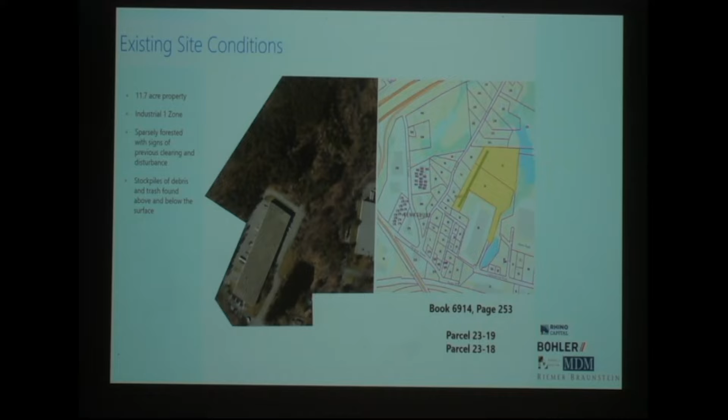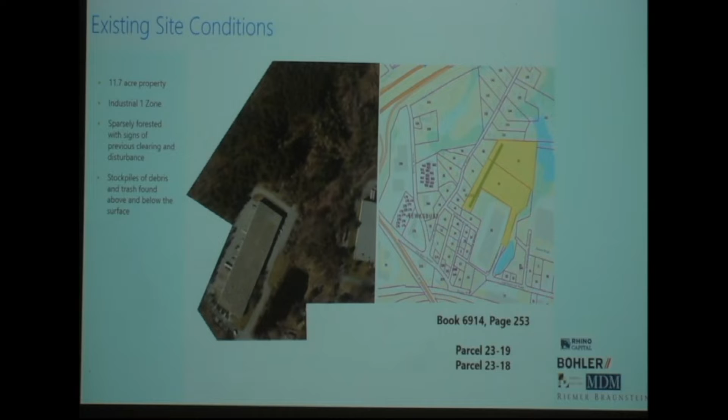This slide is the same one we've seen in the previous two presentations, just a quick refresher since it's been a couple months. These are the existing site conditions - just over 11.7 acres behind 30 Commerce. And here are our proposed conditions. This colorized plan shows an 87,000 square foot building in an industrial zone. We've got 58 employee parking spaces, 4 of which are land bank, which we reviewed at our last hearing. That represents a 30% reduction over the code, in line with the waiver requirement for the bylaw.

Overall, aside from that, if we were able to blow up that zoning analysis table that's been submitted, the project is compliant with all the zoning bylaws.

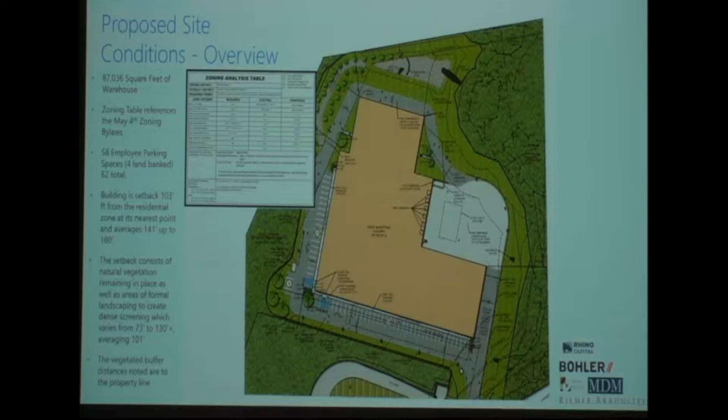So we have one slide on traffic. Do we want to hold this to the end, or do this now? What's best for the board? Why don't you do the rest of it, and we'll do traffic one time with the consultant. Understood.

So site revisions, Greg, I'll let you go through those. Just to recap, these were some of the changes we made and presented at the last meeting: the addition of those banked 4 parking spaces directly adjacent to the building corner entry, a concrete pad for the bike rack, and blocking off access from the back portion of the building except for emergency situations. We also changed the lighting pattern back there so it's all motion sensor, so there's really no activity happening at the back of the site, and no lighting either, except when somebody is around the back of the site.

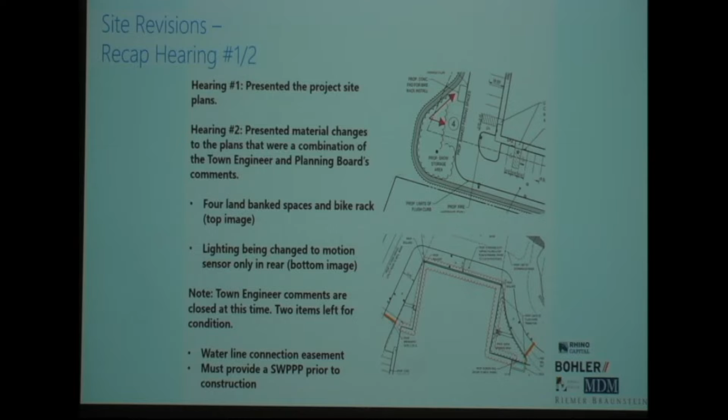And then I'll just talk about the town engineer comments real quickly - those are the two things I mentioned before. The comments are closed except for these two items. One is there's a water line that exists on the 30 Commerce property near our property line; they'd like us to get an easement in place with the owner to access that water line, since we need to tie into it. The second, which is also in the conservation conditions and is typical, is that we need to provide a SWPPP, so we just don't pull that until we're ready to go.

So the latest plan changes, which were pretty minor, nothing adjusted from a site standpoint, no changes in parking, circulation, impervious coverage, anything like that. But we did enhance the plan with substantially more landscaping, a lot more vegetative restoration plantings.

Previously, these areas here you see in the tan color were really just a lawn, a sloped lawn. Now we've gone in with a final landscape plan prepared by our landscape architect, a lot of native species, restoration style plantings, and also reduced the maintenance path that we had down to the basin, so made that smaller so that we had less impact into the vegetative buffers on basically the residential side.

The reason for that was really just in response to town engineer comments about peak runoff. It was a way to address stormwater mitigation and make sure that we comply with all the requirements, and basically just a nice way to do that with vegetation versus trying to incorporate additional mechanical treatments or anything else to address the stormwater.

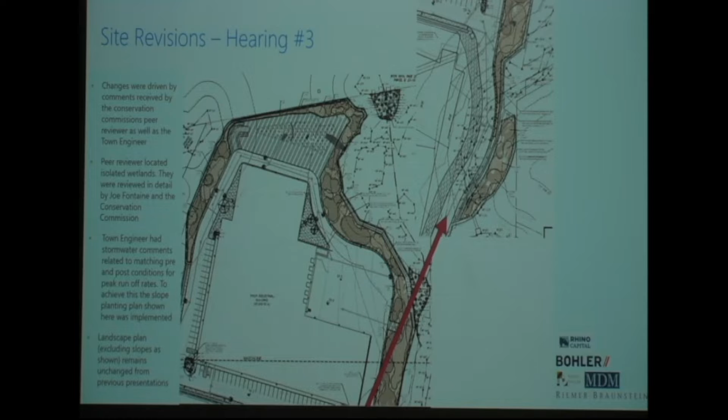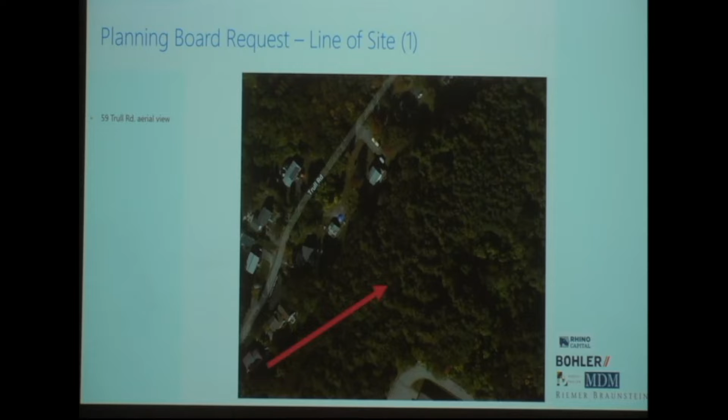As mentioned at the last meeting, we talked about doing a couple views from some of the residential, basically the backyards off of Trull Road. Here we're gonna have two examples to show you of really what this will look like with building in place. The only reason the 59 came up was just because it was a specific request made at the last one for that address.

So it's roughly 400 feet of forest, and when you do a view going through that much forest, it just doesn't look like anything except what it is, forest. It's hard to see through that much. It's longer than a football field. So the view doesn't look like much because there's nothing to render through that much forest.

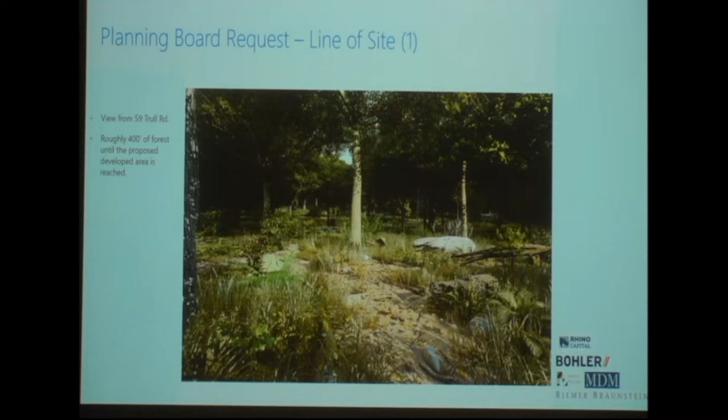And this plan doesn't include any plantings that would be on our property, so it's absent that. So again, when we ask architects to do this stuff and they're looking through that many feet of forest, it is difficult to see what's on the other side.

But I do at least want to show that I think there will be some views and some glimpses available where you will be able to see the top portion of the building. But again, us adding in our landscaping and now even further the sloped planting that Greg just showed, it's really going to assist that greatly.

So that was really kind of it as far as any updates that we've made since the last meeting, except for traffic. So if you want, I can go back to traffic. Yeah, why don't you go back to traffic, and then we'll bring up the consultant. Do you want to come up here? Yeah, any improvements?

Yeah, so this just recaps what we've done. So the hearing one. If you just state your name for the record. Dan Dumay from MDM, Senior Project Manager. Thank you. This is the first hearing. We presented the traffic report that we did, full comprehensive report, safety, intersections, all that stuff.

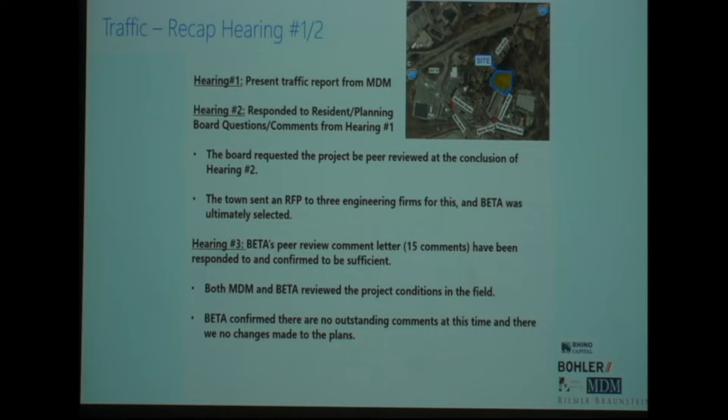Bear with me as I go through each one here. We looked at, generally, an overview of what we evaluated, both from a safety concern and an operational concern. Both the existing safety and operations at these locations are not what we regard as significant or a concern, and the additional traffic associated with this development would not create an undue burden on the adjacent transportation network or intersections. That's more or less the overview of what we got into.

We asked them some questions about the Route 38 corridor. We understand that's a coordinated system, but going back to what this development is expected to generate in terms of new traffic and demand, the operations at the Old Main intersection with Route 38 are not expected to be significantly impacted. Therefore, we wouldn't expect the downstream and upstream intersections to be impacted significantly either.

We asked for additional information regarding the turning movements. I believe what was initially provided was a ladder truck or fire truck diagram. We requested, because of this type of development, a larger vehicle - I believe it was a WB-67 - which was provided and showed that the vehicle could maneuver appropriately through the new site. That's more or less it.

Okay, does anybody have any specific questions for the traffic consultant? I do, Mr. Chairman, thank you.

So did you review the lights at the corner of Main Street and Old Main there? So we reviewed their analysis of the operations at that traffic signal. As part of their assessment, they included an analysis and evaluation of that signal, both as it currently operates and as it would be expected to operate in the future with the new development. We found that additional traffic at that intersection would not be expected to have a significant or adverse impact on operations. At the end of the day, it's just not generating significant demand in new cars.

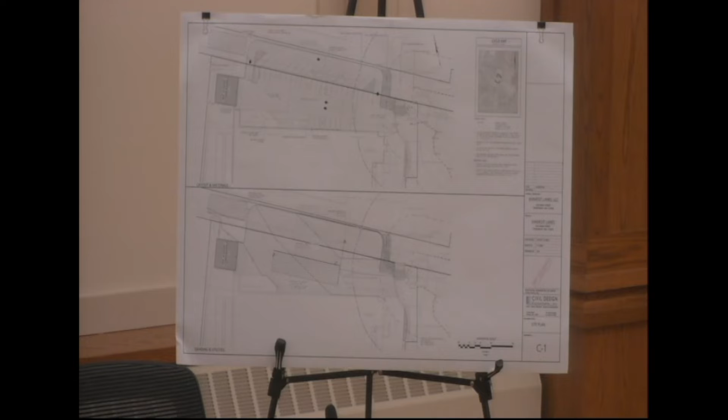A waiver request form has been submitted as part of the application. As Dick mentioned, we've received comment letters from the DPW with a handful of comments that we will address, and we are also waiting on Conservation Commission approval as it is within the buffer zone of a wetland. With that, I'd like to open up to the board for any questions.

All right, we'll start with Mr. Frataia. Thank you, Mr. Chairman. So did I hear you say 44 spaces in the back? Yes. Okay, I believe the last time we had, what did we have, Tom, like 20-something?

It was about that, yeah. We had somewhere around 20 spaces, but with the additional land up here, we were able to add more parking spaces. And basically, the employees will be parking at the back of the building, along with some staff and people familiar with the area.

We've got it laid out so that there'll be an accessory building in this location, which will add some additional storage for products, prizes, non-food items, and things of that nature. That's a good amount of spaces, 44 spaces.

That's a lot. Well, on certain events, it helps having the employees not take the parking spaces in the front, leaving the front spaces for the patrons. So I recall back in the day, you guys spent a lot of money, hundreds of thousands of dollars, getting the front section done with drainage, correct? Correct.